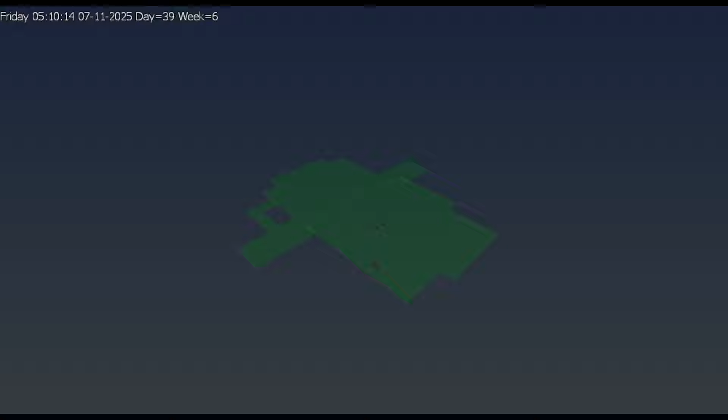Here you are seeing a time-linked construction simulation of a multi-story industrial project, including basements, split ground floor, mezzanine, and upper floors. The model is connected with sequencing, structure first, then walls, then facade elements. This allows teams to visualize execution before stepping on site.

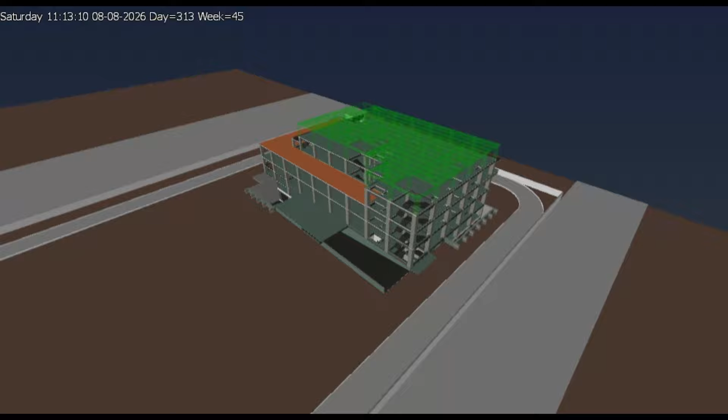For contractors, it improves planning reliability. For developers, it enhances predictability in timelines. For project managers, it strengthens monitoring and coordination. Here, BIM becomes a proactive planning tool, not just a drawing replacement.

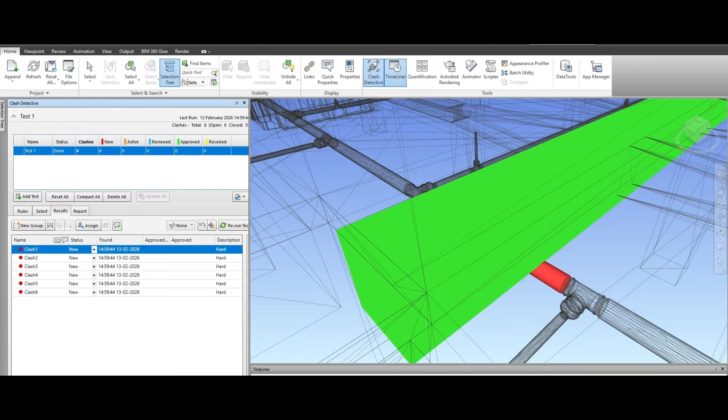But planning alone is not enough. Preventing conflicts before execution is equally important. At the basement level, you can see structural beams intersecting with fire services. Through clash detection, these conflicts are identified digitally before they become costly on-site issues.

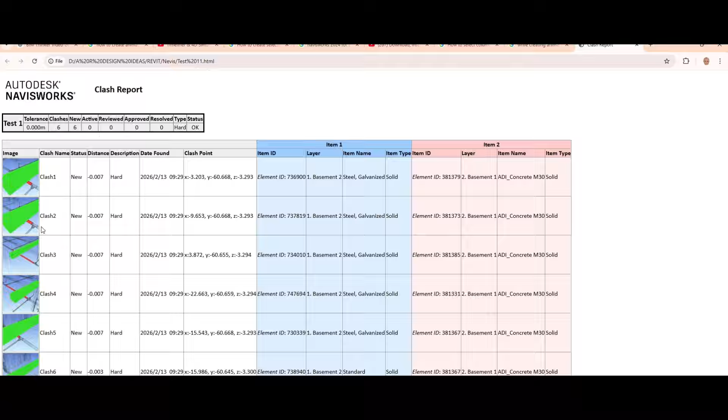Instead of discovering problems during installation, we resolve them during design coordination. Beyond detection, we ensure full coordination within the ceiling zone, aligning HVAC ducts, fire lines, and utilities, eliminating rework and execution delays. This directly improves quality control and variation costs.

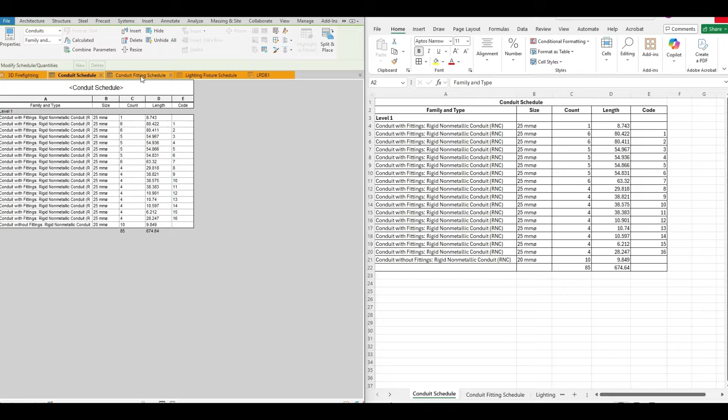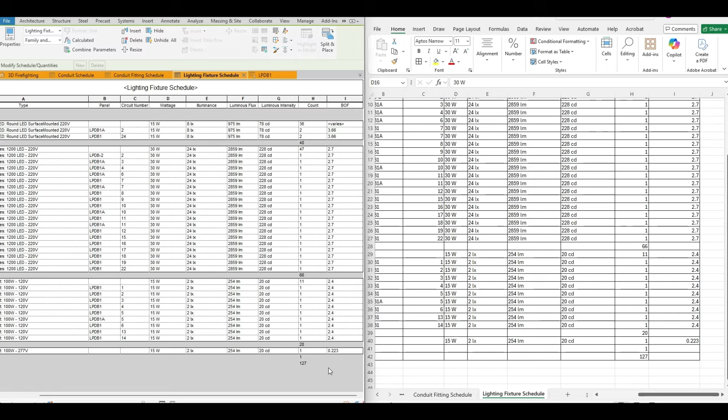But BIM also brings clarity to quantities and documentation. Here, the model automatically generates detailed schedules, including conduit fittings and light fixtures with precise counts. These quantities can directly integrate into relevant BoQ sections, automating item identification and reducing calculation errors. The data remains fully traceable to each 3D element, strengthening cost control, saving time, and allowing teams to focus on

core project decisions. In addition to quantities, BIM can also assist in validating compliances. For example, in hotel projects, room sizes and functional spaces can be checked against brand standards or industry norms. Similarly, certain building bylaws requirements can be verified at the stage of model, reducing approval stage surprises and redesign cycles.

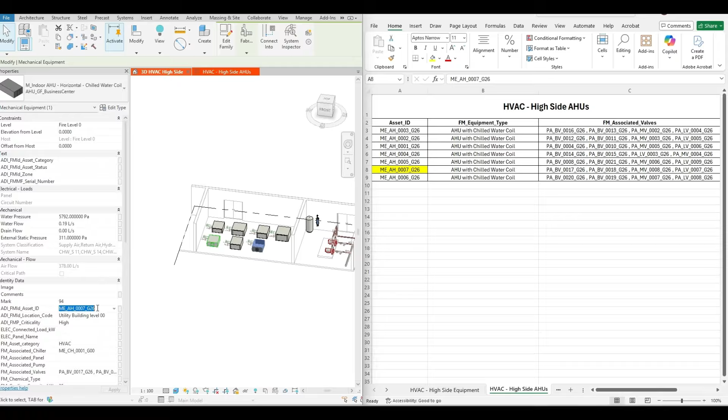In this hotel project example, a specific AHU can be identified in the 3D model, tracked through its asset ID, linked to schedules, and exported into structured Excel data. This transforms the model into a structured information system ready to support facility management and operational tracking.

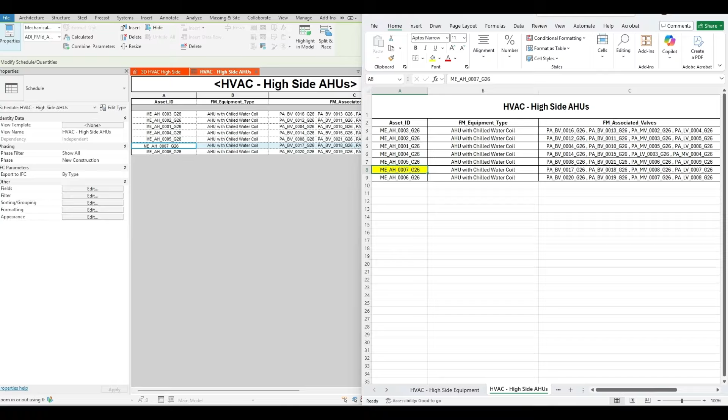For owners, BIM becomes a life cycle asset, not just a construction deliverable. When structured properly, this data can be further integrated with building management systems and IoT-based monitoring environments. It can also support sustainability documentation and performance frameworks such as the Indian Green Building Council IGBC and GRIHA, where reliable data and structured documentation is essential. In this way, BIM becomes a foundation for smarter and sustainable buildings.

What differentiates my approach is three things. First, automation. Wherever possible, models, schedules, and data workflows are generated through structured automation, reducing manual repetition and improving consistency. This also becomes particularly valuable when converting existing 2D projects into structured BIM models. Using automated workflows, legacy drawings can be transformed efficiently, saving significant time and reducing cost compared to conventional remodeling.

Second, stakeholder alignment. A developer looks at time and cost. A contractor focuses on coordination and execution. A PMC prioritizes reporting and compliance. An owner thinks about lifecycle management. I adapt BIM implementation to these varied priorities rather than applying a generic template.